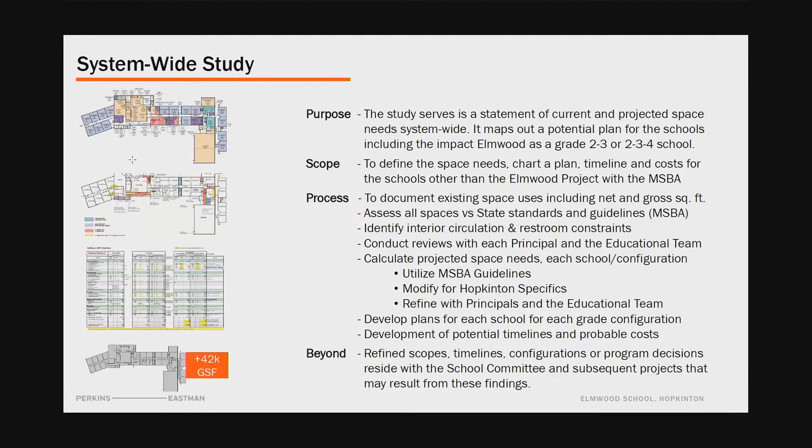So we painted this picture for both the current configuration as well as the grade 2, 3, 4 configuration.

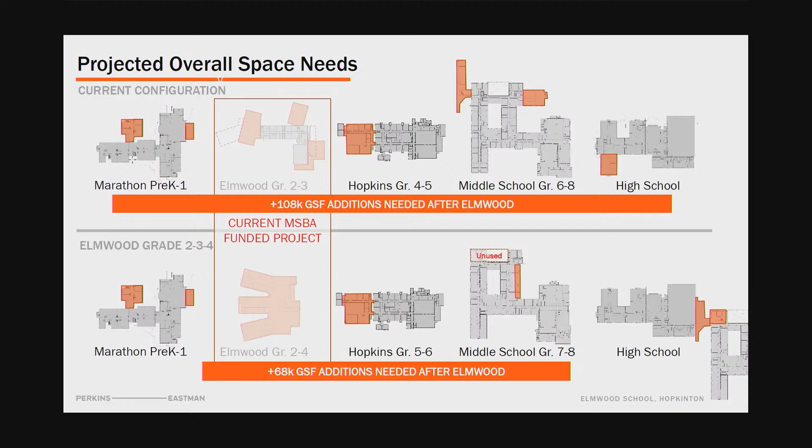This shows the total square footage of those additions in aggregate. If you take the current Elmwood School project out of the mix, we can see about 108 versus 68,000 square feet for the two different configurations.

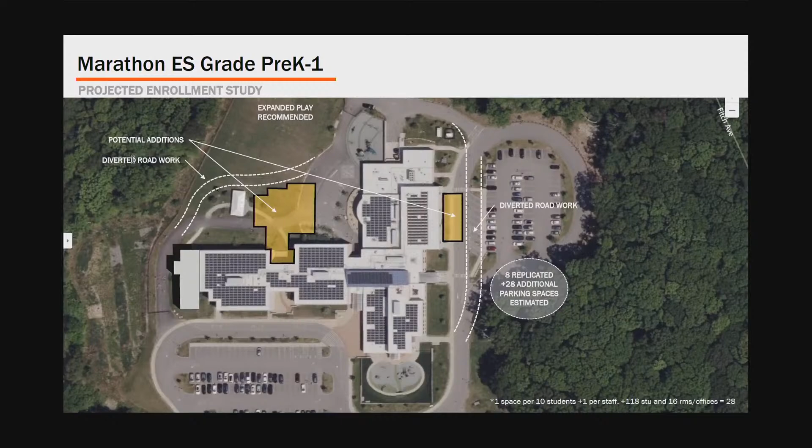What we did through an iterative process of meeting with the educational team, which includes educational leadership, facilities and finance, and input from the building committee or school committee in our earlier sharing of information, we've taken a look at each site where we might want to build onto each school and plug that program in. We did that for the Marathon School, obviously for Hopkins. In either configuration, it turns out to be about the same.

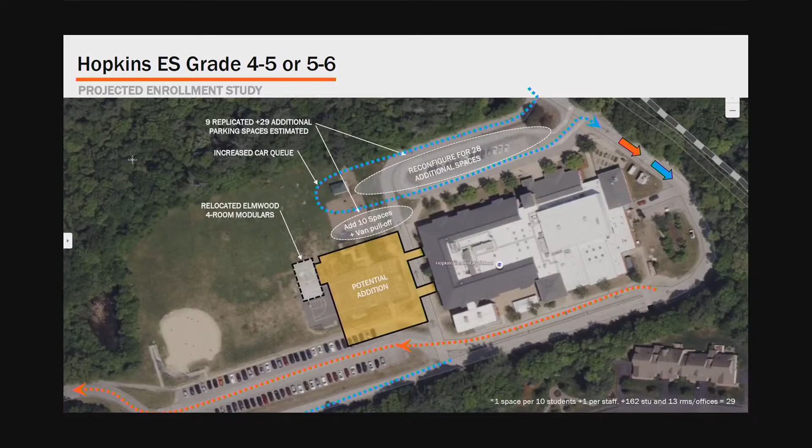Whenever the logical place for an addition affects the roadways, we've tried to account for the parking displacement and maybe improve some circulation that needed to be remedied as a result. So we have plans that step through Hopkins as well.

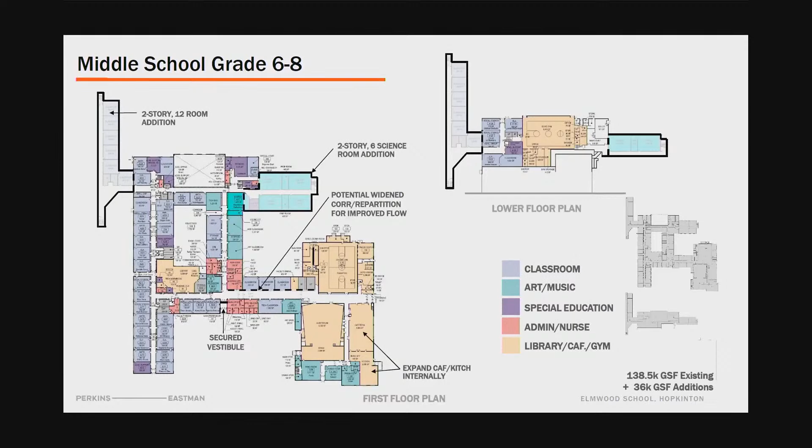For the middle school, we have both the 6-8 current configuration, potential additions, and the floor plans that align with those, and also the grade 7-8, which by removing one grade certainly creates a lot of potentially unused space that can become available for, say, the high school. In this case, we are still showing a small addition to increase science labs where they exist currently.

Again, we can go into detail if needed, but I'm going high level over these additions. For both the middle school and the high school, there's a desire to potentially connect the schools so that it might offer greater flexibility long-term and greater opportunity academically. Some of the areas we looked at are actually in the space between the two schools, and there is a means to connect them and utilize that as an opportunity.

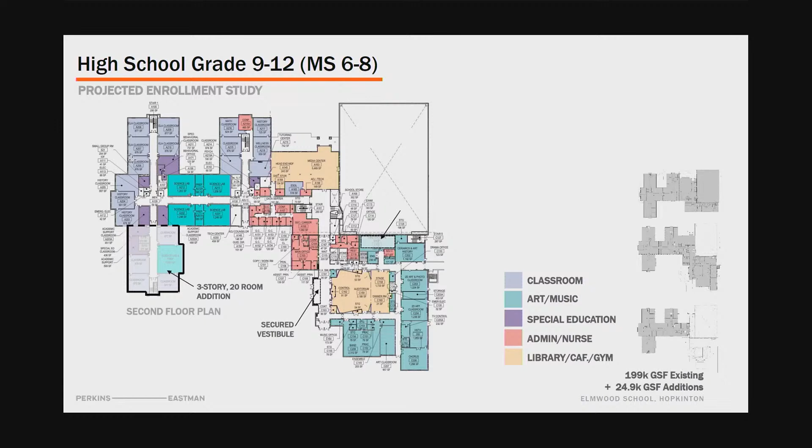And finally, the grade 9-12 high school - if the middle school was the 6-8, it would not be able to utilize some of the vacated space in the middle school, so here we're showing a consolidated addition in the front. With some of these, it requires an additional permitting process if there's wetlands or zoning impacts or other fire safety or perimeter access concerns. So each one of these may take a slightly different path, and I think that's reflected in the timeline.

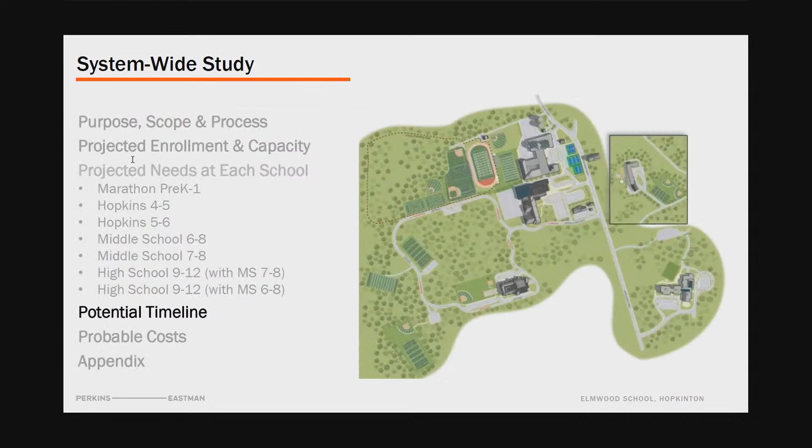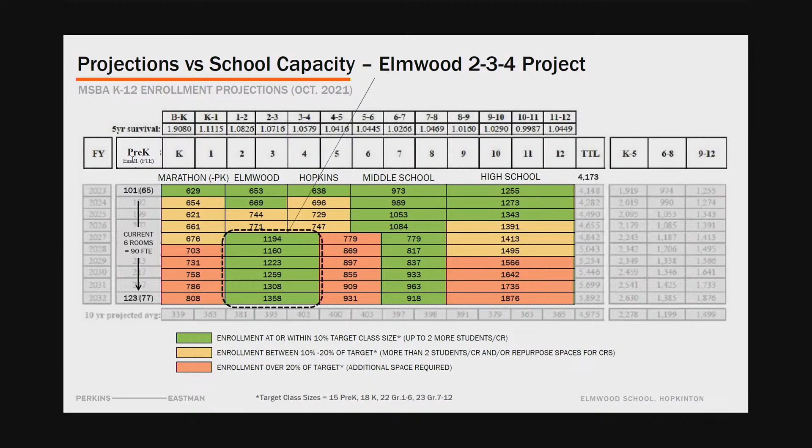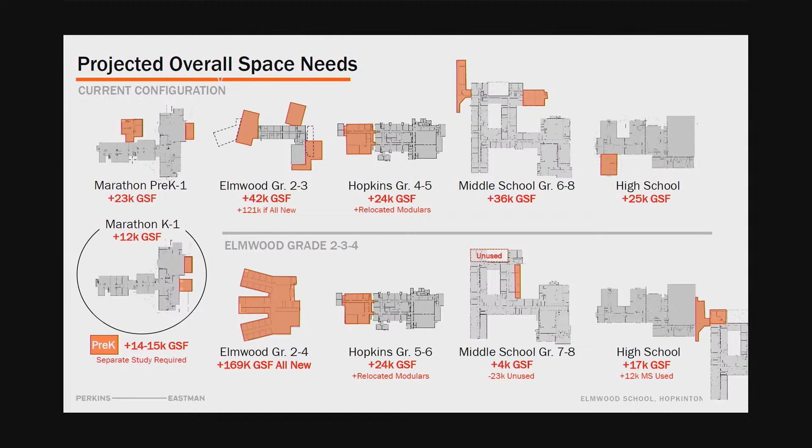It's right in between, because when you remove pre-K and make it its own program, whether renovation or standalone, there are some inefficiencies of space needed. A nurse is an example, having nurse facilities within the school. So for the most part, it is the pre-K classrooms removed and their administration and directly associated special education needs, but you're also duplicating a nurse, a version of a family resource center, toilet rooms, boiler. So it's not a new building that is the size of our current pre-K space plus 14 to 15,000 square feet — that 14 to 15,000 is the new space needed.

And then my last question, this is more on the timelines. You mentioned that on the estimated timelines, you have May town meetings and November town meetings. We are planning to do a special town meeting for the Elmwood project in November of '23, but we don't normally have a town meeting. I'm wondering, from a presentation perspective for the school committee and district, if it would be beneficial to look at what those timelines would be if they had to be May. Can we move them up? Can we move them back?

Getting a special town meeting is a big deal. So I think when we think about making this easy for people, if we could find a way to line those up with May town meetings, we'd be better off. The other thing with a special town meeting is that it gives the impression that it's a last minute emergency, as opposed to a well thought out and carefully constructed timeline that fits into the current town meeting schedule.

Thank you for the detail of this study. It's a very important study to have, and as people become more aware, we're talking about 10-year projections, but we're also going to have discussions about 12 months from now. So this isn't going to be a 10-year decision, it's going to be an 18-month decision. It's coming up very quickly, so it's so important to have done this. There's a lot of numbers, graphs, and charts, it takes a minute or two to understand it all, probably 2 or 3 times through. But thanks for doing such a great job. I think it's going to help the community put this all together and understand that we've got some tough decisions to make.

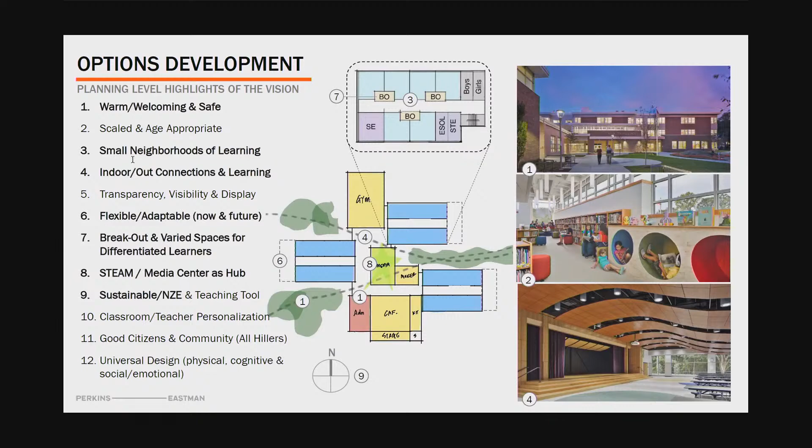This was presented last go around, where we were just talking diagrammatically about how a building comes together and how some of these elements may show themselves in a plan. Not everything can be seen at the planning level, but many of them can. The ones highlighted here do show up. Something like sustainability, smart planning, means you have good orientation for your classroom wings, for energy efficiency and for education, so we consider all these things.

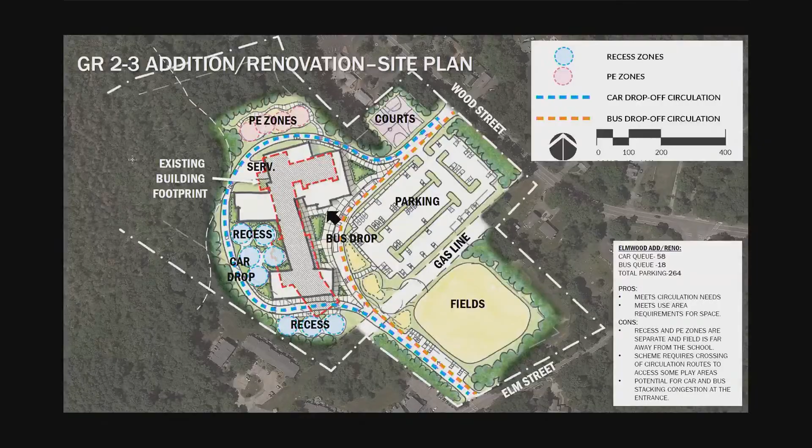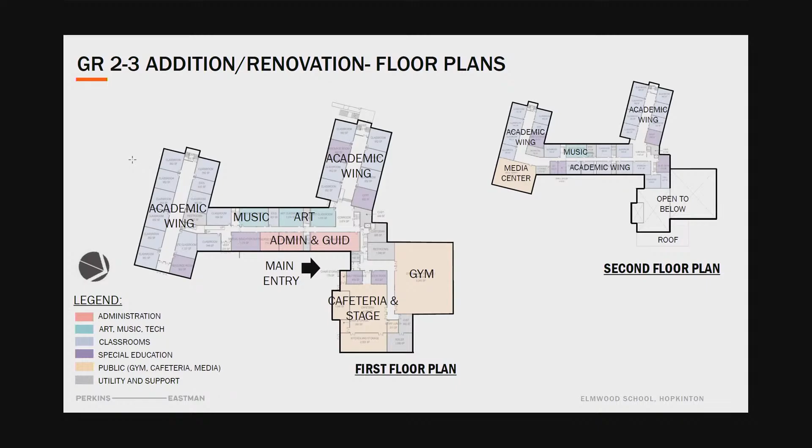Like the media center as the hub, obviously — Bob went back to it — the media center ends up down on the end of one of the new additions. So there are some goals that aren't achievable based on the addition-renovation constraints.

Just to step back, I know you've come down to two sites. What we'll show you now are two different new construction options on the Elmwood site, and then two different designs on the Hayden Row site with some different location options — so same plan, but multiple site locations. I think it was alluded to earlier with the question about the potential for a pre-K there and where that building gets located. So this is the first of two on the Elmwood site.

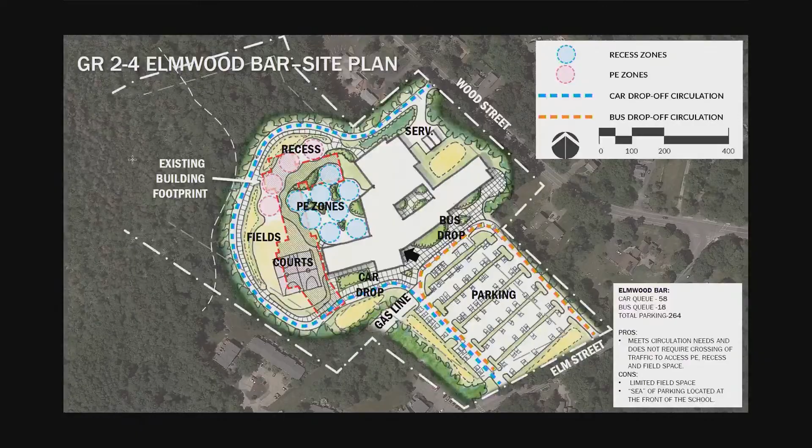So that's a nice lead-in to the floor plan. These are all a work in progress - there are improvements that need to be made.

What this does is create that media center hub as you walk in the main entry - it's kind of a focal point. You've got the academic wing splaying out, and then the community and shared spaces to the north. But this is the 3-story with the larger 2, 3, and 4 grade configuration.

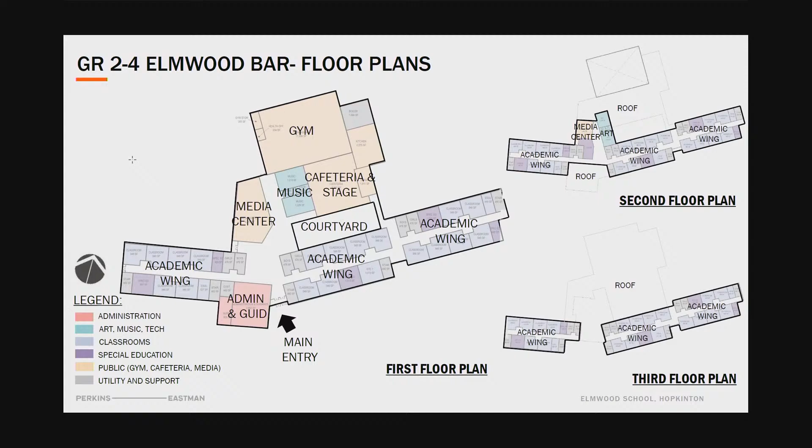We spoke a little bit about what the constraints on this site mean, and building up against the existing building, how disruptive that is. I know there's been some talk about displacing the students and moving them to a temporary location. I don't know if that's still worth considering, but as we looked at new construction and the size of the footprint needed for the grade 2 through 4 configuration, we said, well, what if you move those students for the 2 years this project needs to be built in order to place the building in a good location.

Have proper solar orientation, have good access both off of Wood Street as well as Elm Street. What does that do? So you can see this building footprint - we're calling this the Elmwood Village. You'll see a similar village design, similar but different in that it's sort of a spoked hub, right - you have that central shared space in the middle. I'll get to the floor plan in a minute, but the academic wings splay off of that.

And what this does is give you a little relief at the front. You have more fields, you have the courts, you have a separate bus and car drop. You still sort of have that sea of parking, and we can adjust based on the gas line, but in order to build the new building and then replace the fields with the parking, you still end up with a substantial amount at the front to meet your 264 spots. But what this does do is tuck it nicely on the site - it's not constrained right up against Wood Street or Elm Street.

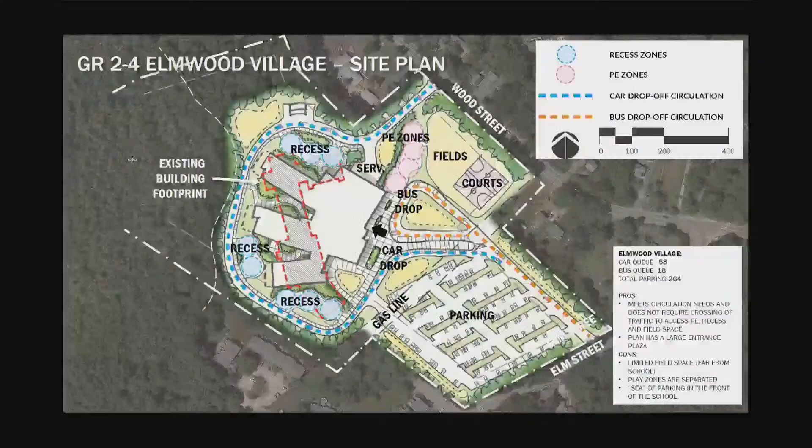At this level, I know it's pretty granular, but what we tried to do was understand the number of recess zones required for the prorated amount, and zoned them. We haven't necessarily determined exactly what they are. Our landscape architects work directly with us to make those architectural and landscape connections, and they're really good about providing variety and choice to the students. There may be structured play in some cases, and working with them in the past, they've done more natural play areas with physical and sensory elements. As we hone in on a design and work further with them, we'll identify what that means.

In this case, I think it's preferred that they be contiguous, is what I thought I heard. In this scenario, because of the constraints with this site, it's probably not as achievable to have that many separated. So we can talk to the users more and hear feedback about the ideal situation if they were separated - I think that would become a whole other scheduling thing for the administration, since now they're scheduling their recess as well.

You know, these classrooms are on playground day - Mondays, Wednesdays, and Fridays. The size of those playgrounds looks beautiful compared to others - that's a problem I would love to have. I was shocked how small the play area at the current Elmwood was when I saw it. And are they scheduled now because of the different zones? It would actually probably be a little bit easier, although you don't know what you don't know, if you had more options. Right now we have one tiny space, so that's why scheduling it is so challenging.

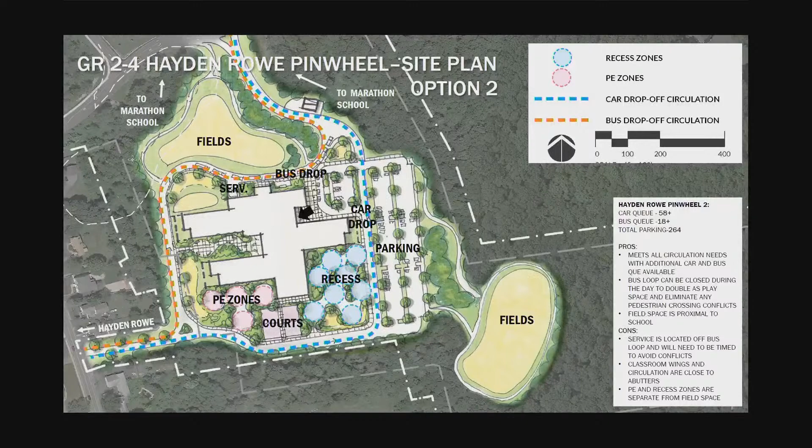What you see here is there's contiguous recess and PE zones nearby to the gym. The fields are a little bit disconnected in this one from those, and the parking is mostly on the east, directing you to the front entrance. I don't think I'm missing anything else here. It looks like there's visitor parking closer to the front entrance and staff parking a little farther east.

The footprint shown is the first option with the entrance on the left, but if you imagine this whole thing flipped, it's what I just showed in the second site plan option. The main entrance takes you into a centralized community space with the gym and cafeteria bookending the heart of the school, the media center. You've got admin right near the main entrance, and then the academic wings with ideal north-south facing classrooms.

So this is one of the best sustainable footprints we're showing. And again, we're 3 stories because we're grades 2 through 4—we don't want the footprint to get too large. These are young students we don't want traveling throughout the building so far. We've got music near the caf and the stage, and art upstairs.

I have an accessibility question. If we have 3 different wings on the 3rd floor that are completely separate from each other, and you have a child with a physical disability, would you need elevators in every wing? Technically, yes. I pointed that out to others working on this, and I'm trying to consolidate so they're connected. In this case, I'd actually argue you still might want 2 elevators because the students are so young that you don't want someone to have to travel from one of the more distant classrooms to the centralized space where the elevator likely would be.

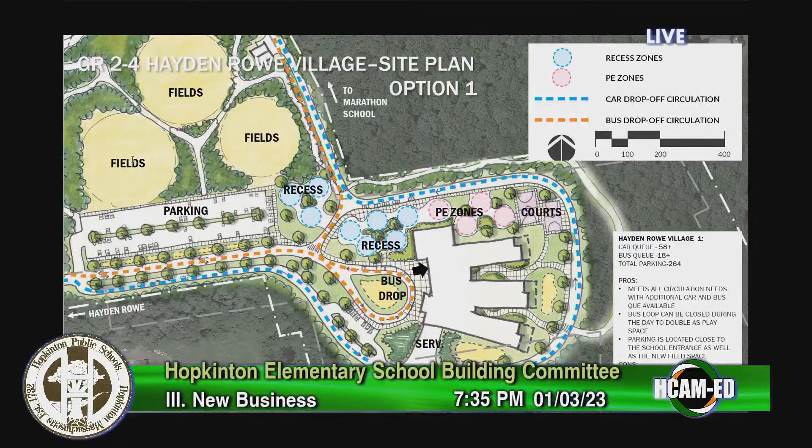I think getting parking a little closer to the building, looking at this option here, that's tough, right? It's not so bad in the warmer months, but in the colder months it can be a little rough, it's a hike. And then recess areas, if we're not crossing any roads to get to recess play areas, I think that's going to be a big deal for us, and hopefully we can do that.

That's a good point, Tim. If you think about using the school at night for the after-school program, for example, they park at the top of our driveway, and when they come out at 6 o'clock at night, it's pitch black. It's a long walk on a winter night for them. So I think those would be just kind of my comments as you're honing in on it, keeping the play areas within the building space if we can.

Got it, thank you. And there was one picture that showed the art rooms kind of separated, and I wonder if there's a way to keep it the same way you did with music, have the art...

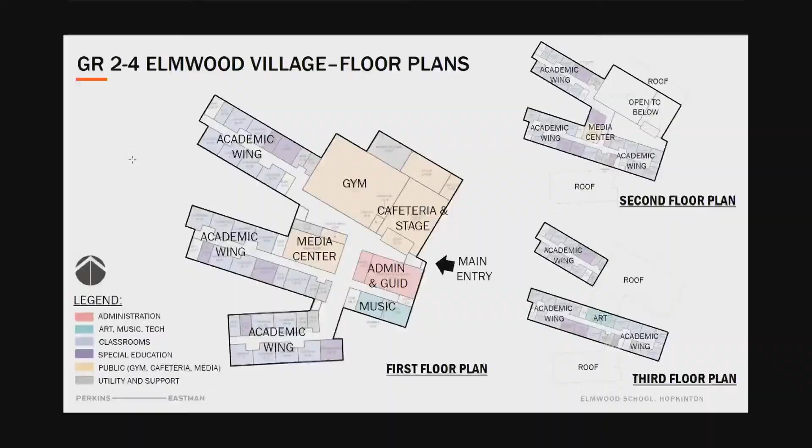The Hayden Rowe Village, yeah, it was 2-4 on the village. Keep going, this one, yep, there you go. Looks like the art rooms are kind of far apart. Well, when we adjust the media center, I will back to back those so they can share a project space. Yeah, that would be great.

What kinds of things will the traffic study look at for these options? Is it just the flow of traffic, or I guess from a traffic standpoint, what would we look at? That's what we've asked them to look at, the entrances and how to get in and out, and to make sure, based on his previous work, that we're not putting any planning things into play here that won't work with what his suggestions are thus far. And I think he's aiming to get everything on campus off Hayden Rowe.

And also looking at safety, which side of the vehicle students are getting off at, what the separation is, where the access points are. He'll weigh in on all of that. So typically in all of our projects we use him.

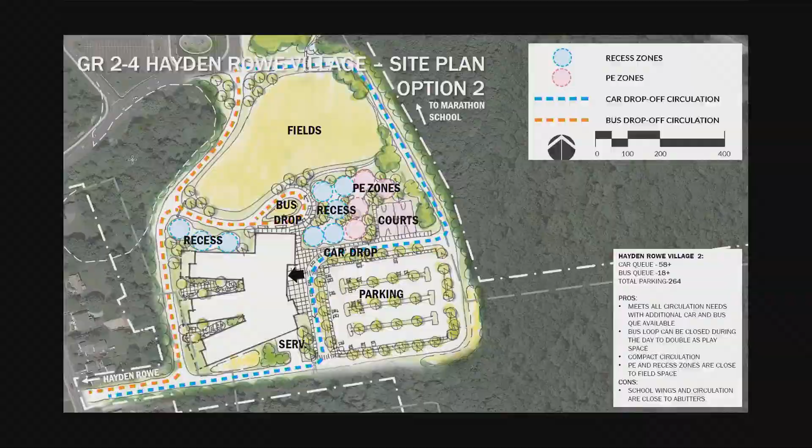Yeah, any road that goes out the other side of the site is gonna go out onto Wild Road, which is a skinny little road to start with. So it's probably not a viable option, but I'll pull the paperwork and share it with you.

I like that when we wrap these meetings up, Mike always has homework to do.

Any other questions on the design options?

Okay, if there's no objection, I'd actually like to flip the last two agenda items, because preparing for our next forum is actually informed by the way the schedule of meetings lays out, that even goes beyond this group.

I just want to walk through where we're going from here, as I keep saying, what is an action-packed January and February from a building project perspective. Some of these are our meetings, some related to the project slightly, some would require our attendance, others it's up to you if you want to watch on TV or show up. After tonight, the school committee is meeting this Thursday right here in HCAM.

And part of their agenda will be to discuss the district-wide study that we were just presented.